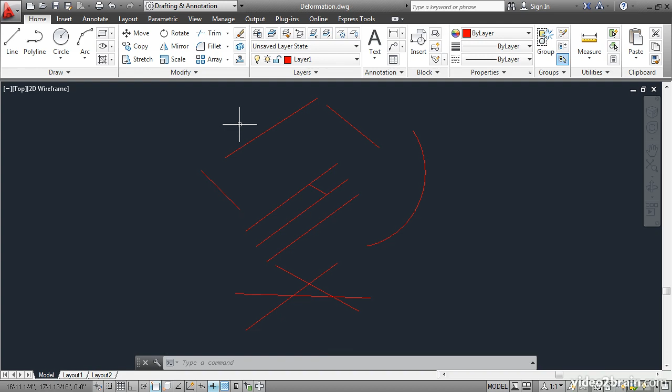There's a more efficient way of using trim, and I'll show you this shortcut. Click Trim, and this time, instead of explicitly selecting trimming edges in this first phase, let's skip over that by using the default option, Select All. All you have to do to execute that option in the angled brackets is press Enter. So just press Enter, and you move on right away to the second phase.

Now all the objects in the drawing are potential trimming edges. So I can go ahead and click on objects to trim them. The part that I click is the part that gets deleted. I'll press Enter to end the command.

Extend is like the sister command to trim, and it's located on the same flyout. And it likewise is divided into two phases. So instead of individually selecting boundary edges for extend, let's use the shortcut Select All. Press Enter, and now everything in the drawing is a boundary for everything else. So I can go ahead and click on an object to extend it where it touches another one. I'll click here, and it gets extended.

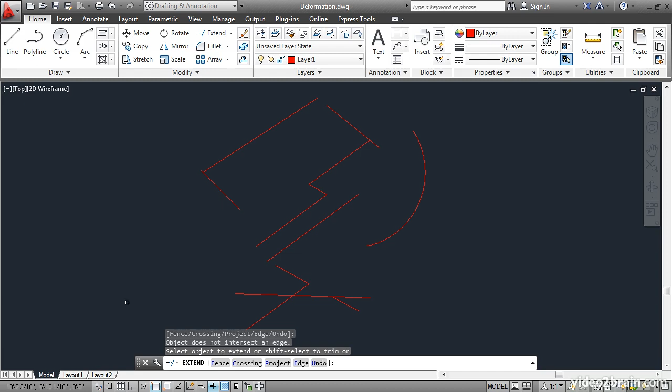I'll click here, and nothing happens because this projected out doesn't hit anything. But if I go ahead and extend this line, I could then extend this one to meet it. You can also extend arcs. I'll click here, and it's extended to the next edge. If I click the arc on the other side, it gets extended all the way around to the first boundary that it encounters.

Another interesting feature of both trim and extend is if you hold down the Shift key, the command inverts to be the opposite command. So I'm going to hold down the Shift key, and I'll go ahead and trim objects by clicking on them. You see? I'm actually trimming within the extend command. I'll press Enter to end the command.

Now let's go back to trim. I'll press Enter to select all edges, and then I'll trim something right here. I'll hold down Shift, and then extend something. So in this way, the two commands are interchangeable. You can trim and extend all from one command. I'll press Enter to end.

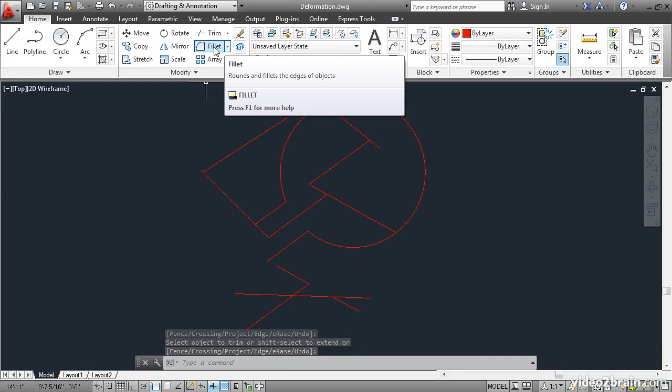Next, let's take a look at fillet and chamfer. Fillet first. Click the fillet tool, and the way that this works is it puts an arc between two selected objects, and the size of the arc depends upon the radius value that you set. Click the radius option, and then type in a value. Now I'm not too sure about the scale of this drawing, so I'll set the radius interactively by clicking two points. I'll click here and here to set a radius value.

Then I'll go ahead and click two objects, and they're joined with an arc that has the radius that I specified. I'll press the spacebar and fillet two other objects together. How about this one and this one?

They have to be extended in order to meet in that curve. If you try to fillet parallel lines, this is what happens. They will be joined with an arc. Note that this arc doesn't have the fillet radius, however. Its size is determined by the distance between the parallel lines.

The fillet command is also used with a 0 radius to join objects in a corner without making an arc at all. Let's try that. Fillet, radius, 0, enter. Then I'll go ahead and click two objects, like these two, to join them in a perfect corner. Let's try that again. Press Enter to repeat the command, and then click two objects to join them in a corner.

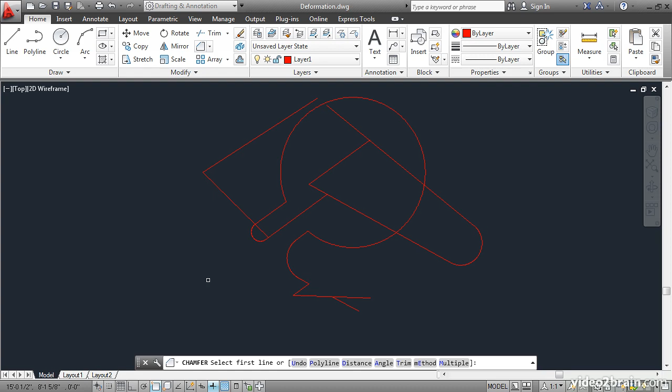Chamfer works very similarly to fillet, and it's on the same flyout. Instead of putting an arc in between two lines, it puts a beveled line, and the size of this bevel is controlled by two distance values. Click the distance option, and then either type in a numerical distance or specify one by clicking 2 points.

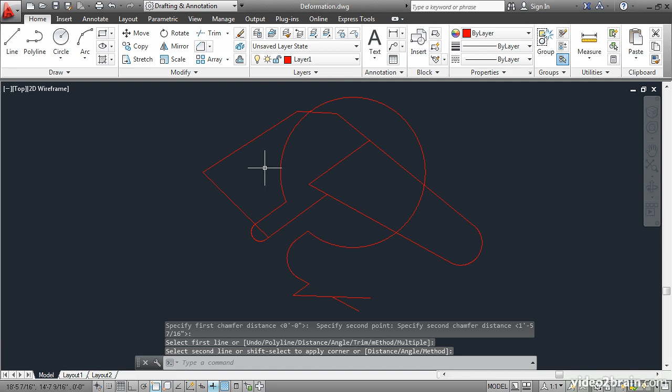I'll press Enter to move on to the next prompt, and then I'll go ahead and chamfer two lines together, and it creates this bevel. I can do that again. I'll press Enter, and I'll chamfer these two lines together, and again they're created with an additional line segment between them.

Let's take a look at the stretch command. This is an unusual command because the way that you select objects is unique. You have to select objects using a crossing window. So if I wanted to stretch this arc and these two lines, I'd have to go down here, click a point, and create a crossing window. Press Enter to get out of Select Objects mode, and then specify an arbitrary base point.

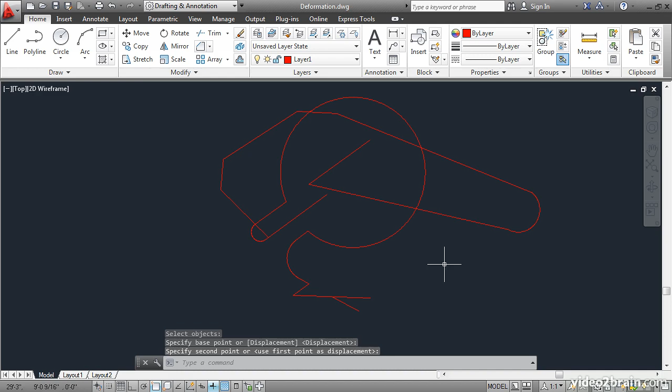Move the cursor and you'll see that you're stretching those objects. I'm changing the shape of the objects because I've picked them up essentially from their selected endpoints. I'll click again to end the stretch command. Let's try that again. Stretch. I'll click here and create a crossing window. Press Enter, click a base point, move the mouse, and click again.

Lengthen can be used to elongate lines and arcs, but it doesn't change their orientation like stretch does. You can find lengthen by using the Modify slide out, and it's right here. Lengthen. Let's lengthen some objects using a percent value. I'll click the percent option, and I'll type in 150 for 150%. Press Enter, and then click on an object. I'll click right here, and the object is lengthened 150%.

It depends on which side you click. If I click over here, the object will be lengthened that way. If I click on this arc, it will be lengthened on this side 150%. Lengthen is preferred if you want to be sure that you don't change the orientation of an object. I can just make this longer and it stays at the same angle, whereas stretch will change the angle and the length at the same time.

In summary, you have learned how to deform objects using a series of specialized commands. It's a good idea to practice using these tools on your own so that you develop your intuition about choosing the right tool for the job.